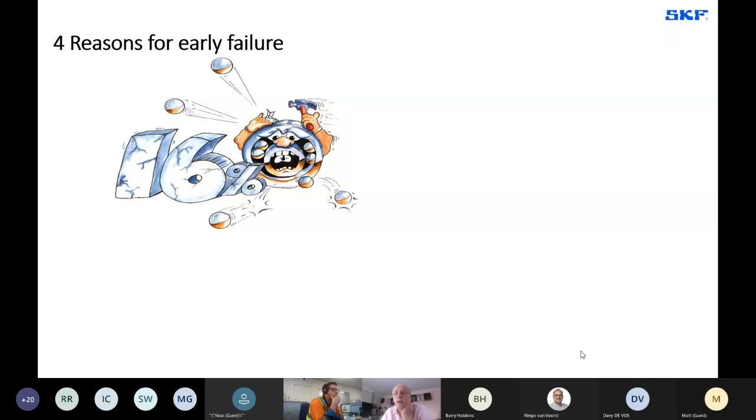We also see 34% early failures due to fatigue, to the wrong type of bearing in the application, or over time, the user demanding more from the bearing - greater speed, greater load, etc. We should also be aware that at least half of all premature fatigue failures, that's this 34%, are due to alignment errors. An alignment error indicates imbalance, an imbalance gives overload, and an overload, of course, also gives early fatigue and failure.

We also see that 36% of failures are due to incorrect lubrication, which is more than a third of all premature outages. Incorrect lubrication - too much, too little, or the wrong lubricant.

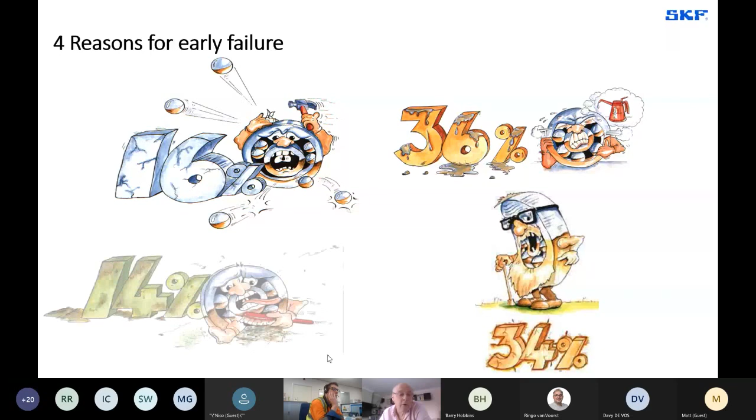Count on top of that 14% by contamination. Contamination from outside due to improperly selected seals, but also initial contamination during assembly, grinding and welding particles, and even when relubricating - there's a high potential risk of contamination. We should maintain it properly so we keep the contamination out.

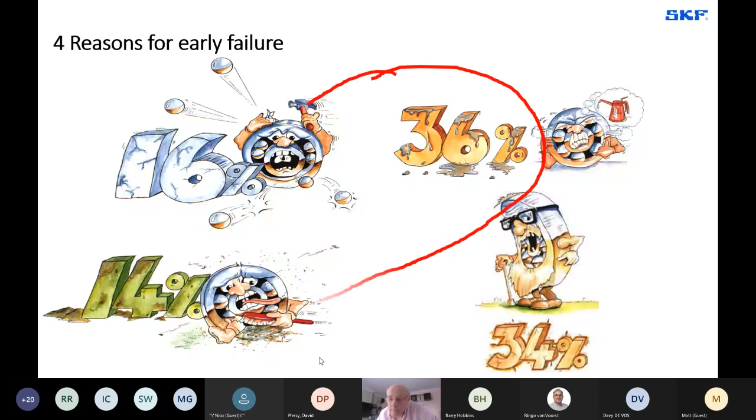With sufficient attention to lubrication and maintenance, you avoid 50% of premature bearing outages. That's more than half of the outages due to lubrication.

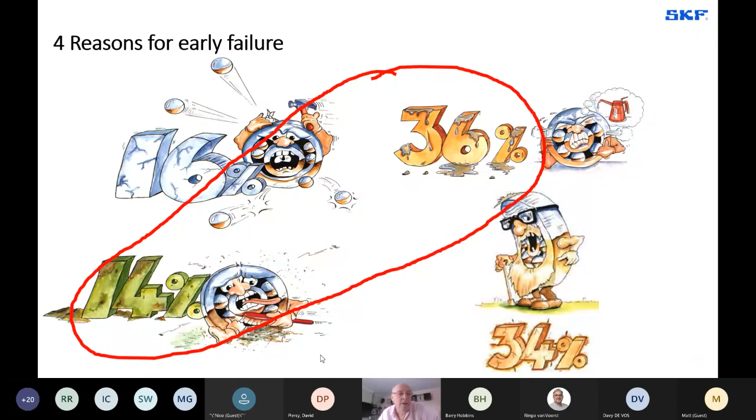So, what is lubrication? It is whatever creates a barrier that reduces friction between two contacting surfaces. This barrier may be one of various media in frictional order, starting from the lowest - gas, which includes magnetic - basically, in that case, you don't have any material or metal to metal contact at all. It just sits in a gas bubble.

Next would be air, also with air but with oil in mist or drop form. Next, oil, which is various types: hydrostatic, hydrodynamic, forced flow, bath. Then comes grease, and lastly, dry or solid.

This webinar is mostly concerned with grease lubrication, as SKF has a presence in most of these lubrication types, but as we do not have sufficient time to do justice to all of them in this webinar, we should just be focusing on grease.

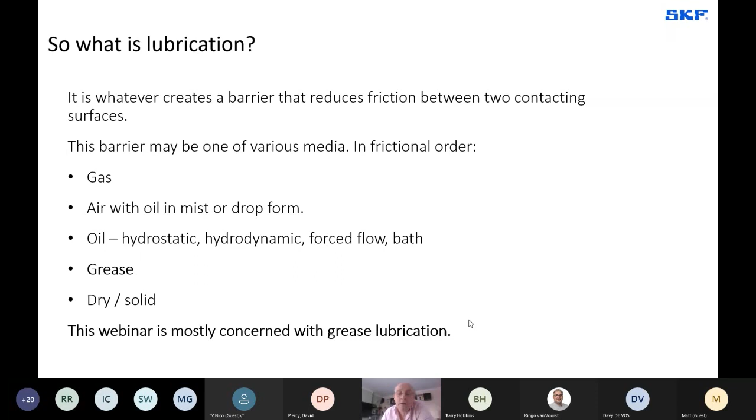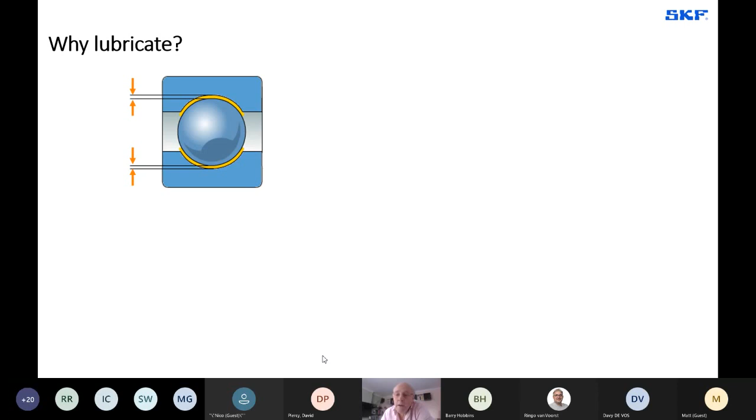So why lubricate? Primarily for separating the bearing surfaces, thus preventing wear and reducing friction. This reduces heat and flushes out particles to lessen secondary wear, as the particles act as a grinding paste to generate further consequential damage.

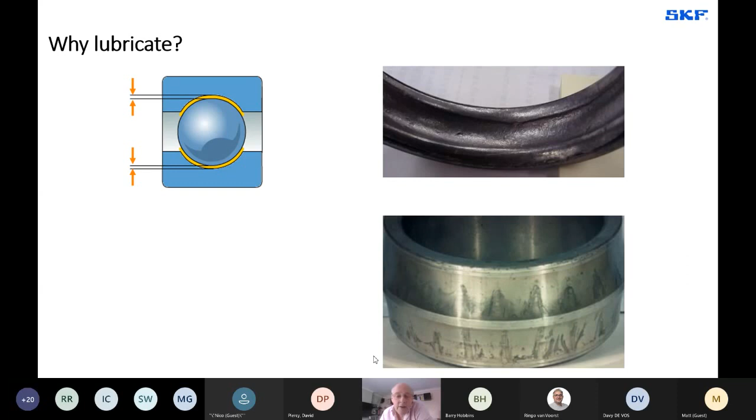Number two, secondary but also important, we lubricate to protect the bearing against corrosion and against external contaminants. We can therefore say that the lubrication acts with the seals to provide an umbrella for the bearing.

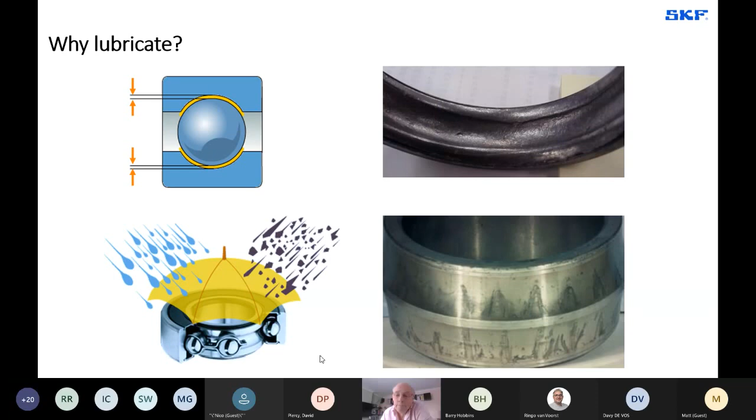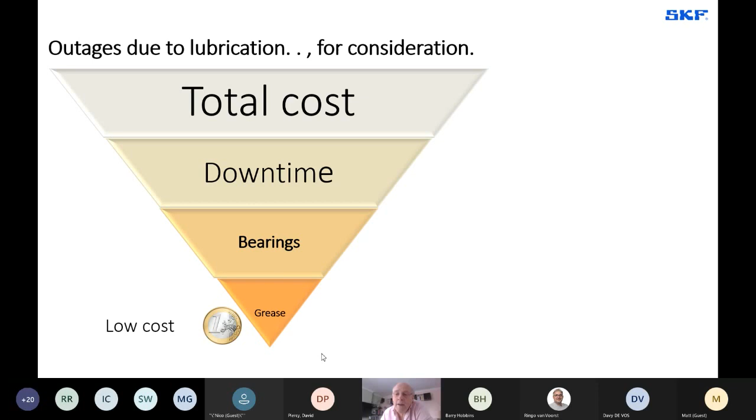When a bearing is properly lubricated and maintained, there are relatively low costs. Now, compare this to the high impact of a bearing failing, causing an unplanned, i.e. expensive, stoppage - high repair costs, consequential costs such as damage to shaft and/or housing, and of course the purchase of a new bearing. It can even lead to unsafe or dangerous situations, i.e. in an aircraft landing gear, in an elevator, an escalator and so on. That's where people's lives are at stake.

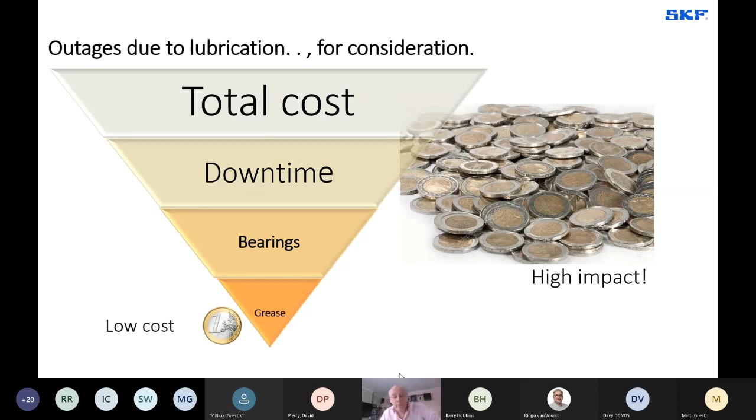Appropriate maintenance and lubrication is clearly a good investment. However, despite this, lubrication is often too much, too little, wrong lubrication, and the wrong lubricant, with questionable cleanliness. Only a partially effective sealing and debatable grease storage and documentation. The importance of proper lubrication and maintenance suggests lubrication management as a basis of operation.

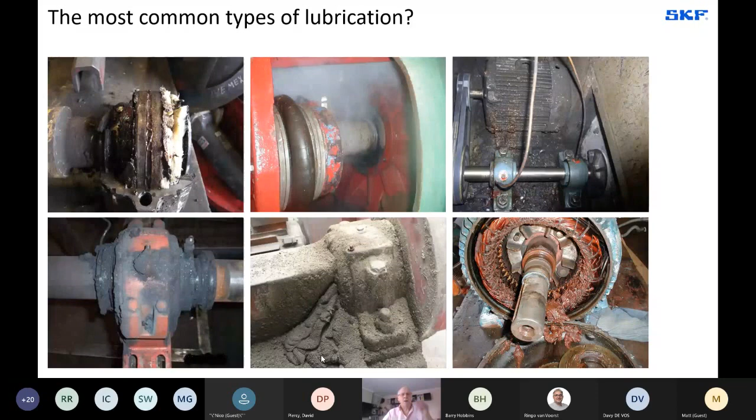Now, how does a good lubricant work? I mentioned earlier the need to create a barrier, separate the surfaces and avoid metal-to-metal contact.

We know that even with water this is achievable when we are driving in our car at high speed through a large puddle. It is called aquaplaning, as you lose contact with the road and nullify any control the brakes may have. Generally not a good idea if you value your life and even more importantly your car, but at least you have discovered lubrication.

You will have discovered, or perhaps remember from your school science lessons, the difference between a gas and a liquid. Gases are compressible, liquids are not. This means that if you load up a liquid, it will tend to displace itself, move out of the way. But during that nanosecond between action and effect, it will support the load. That is why aquaplaning tends to work better at speed.

Windsurfing is a more positive and beneficial aquaplaning example.

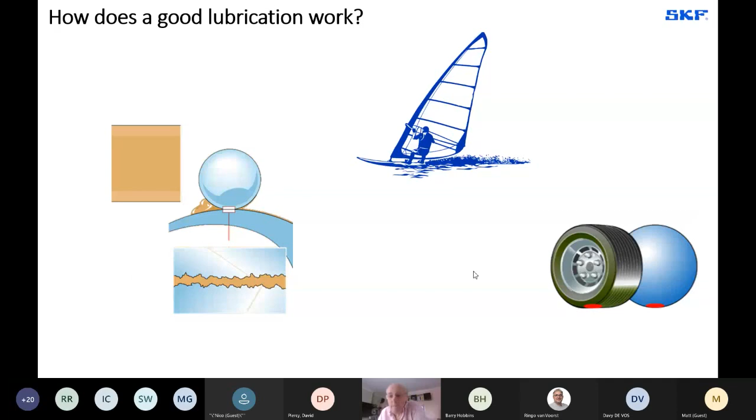In a rolling element, the process of utilising this property is referred to as elasto-hydrodynamic lubrication - a bit of a mouthful, so from now on we shall just call it EHL. In the rotating bearing, wave formation occurs in the lubricant.

That was a mouthful, I've had to take a drink.

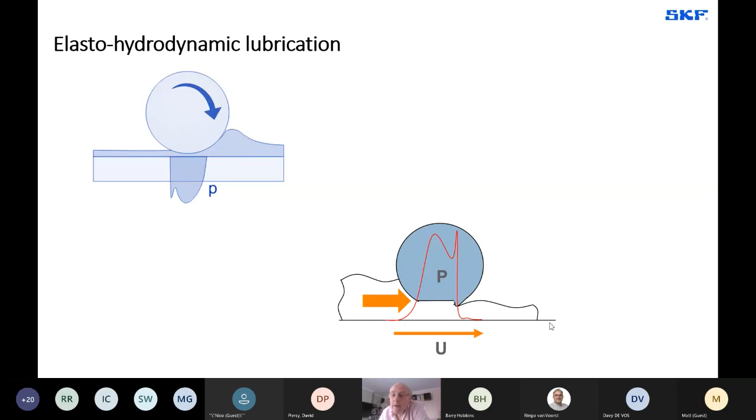In the rotating bearing, wave formation occurs in the lubricant and elastic deformations of rolling elements and raceways arise. These flat areas, like a car tyre, form the contact surfaces that we need to build a lubrication film. We're talking about extremely high pressures of up to 4,000 megapascals in the contact surfaces of the bearing.

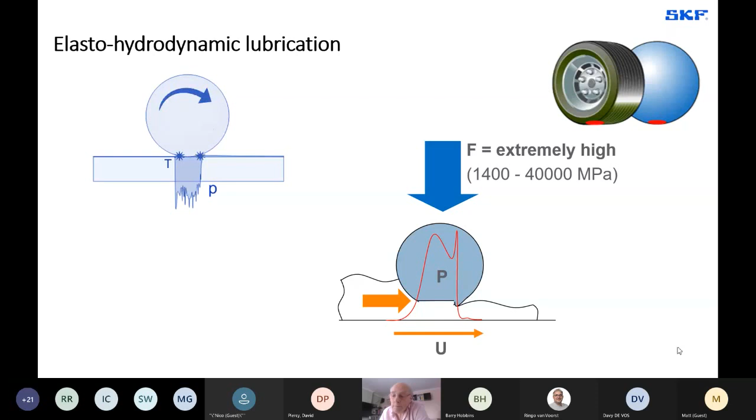As well as incompressibility, the other requirement for a good lubricating oil is viscosity. Viscosity is often described as the thickness or thinness of a liquid. It is highly temperature dependent, and values are usually quoted at 40 and 100 degrees centigrade. Water, for example, has a very low viscosity of 1 millimeter squared per second, more commonly called centistokes - so the units are millimeters squared per second, but usually referred to as centistokes.

That's at 40 degrees centigrade. Honey, on the other hand, is much more viscous than water, and at 40 degrees centigrade has a viscosity of at least 1200 centistokes. All viscosity tends to reduce as temperature rises to 100 degrees centigrade, typically to a figure of perhaps a tenth of the value at 40 degrees centigrade. So 100 centistokes at 40 degrees centigrade will be about 10 centistokes at 100 degrees centigrade.

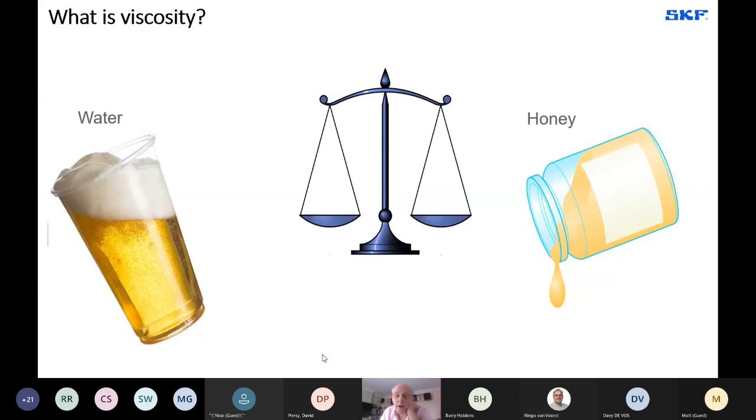That's the ratio. This ratio is normally shown in logarithmic form - you might have seen it in various charts - and it's called the viscosity index. Of course, when water converts to this, it does tend to lubricate pretty well, but I digress - that's just another type of lubrication which we won't be talking about too much in this webinar.

You may also remember from your science lessons the teacher demonstrating viscosity by filling long thin tubes with different fluids, then inverting them and measuring the quantity retained by the fluid's surface tension remaining in the tube. This directly relates to why viscosity is so important to EHL, and why speed and temperature are so important to the process, because the oil needs to adhere to the bearing surfaces for long enough for the process to work.

Obviously, the higher the viscosity, the higher the speed, and the lower the temperature, the easier it will be for the oil to stay in the contact and for a pressure wedge to form. If the speed and stroke, or the viscosity, is too low, it cannot form.

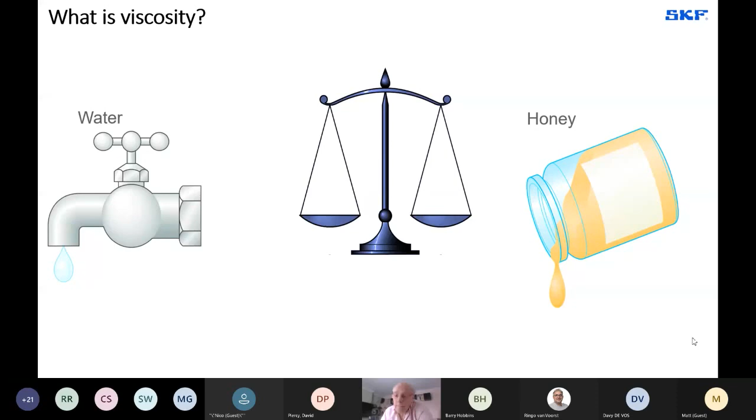Now, viscosity, ISO viscosity classes. When we talk about speed in any calculation, we mean linear speed. We convert it to linear speed, normally millimeters per minute rather than RPM. To do this, we multiply the shaft or wheel speed in RPM by the mean bearing diameter - which is the outside diameter plus bore, divided by 2 - to get what we in the bearing industry typically call an NDM factor.

So it's not necessarily that simple, just looking at the speed - you need to look at the bearing size and the bearing type as well. Also, of course, a given bearing size operating at high speed but also high temperature may require the same viscosity as if operating at low speed with correspondingly low temperatures.

So that's an interesting one. That means that a bearing running at high speed and generating the sort of temperature that would result from that high speed may actually require the same viscosity as one that's at slow speed and generating no temperature at all.

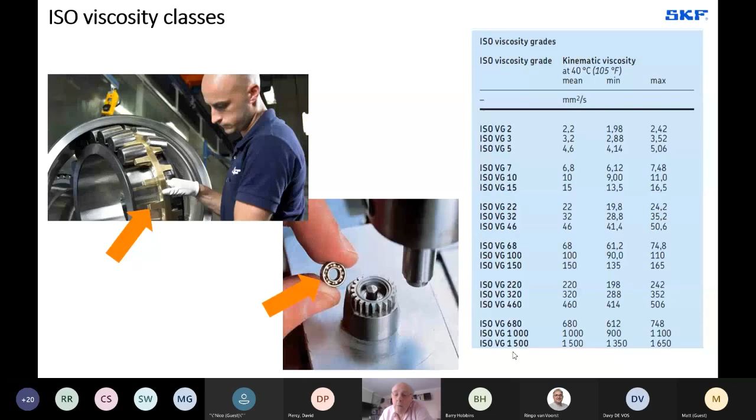My background is in pumps and other fluid machinery devices, which in my experience tend to use ISO VG 32 to 68 - that middle range. ISO VG 100 and above tends to be used for gearboxes and large, heavily loaded, slow movement applications, etc.

Lubrication film buildup: provided we know the bearing size and speed, we can calculate viscosity required to achieve EHL. And provided we know the oil grade and temperature, we can also calculate the viscosity achieved by the lubricant.

So we've got two things: viscosity required for an application, and viscosity achieved by the lubricant. Dividing the viscosity achieved by the viscosity required, we get the viscosity ratio kappa, as shown here, K.

Kappa should ideally always be greater than 1.0. However, if it is much greater, or up to 4 or greater than 4, we get uncomfortably close to the aquaplane example shown earlier, where the rolling elements slide rather than roll, risking premature failure from cage damage as the rolling set moves out of control.

However, less than 1, and the application ends as a boundary or mixed lubrication phase, where there is some asperity contact, shown by a polished track appearance. If you get the bearing apart and look at the raceways and it looks polished, that may well mean the kappa value is less than 1.

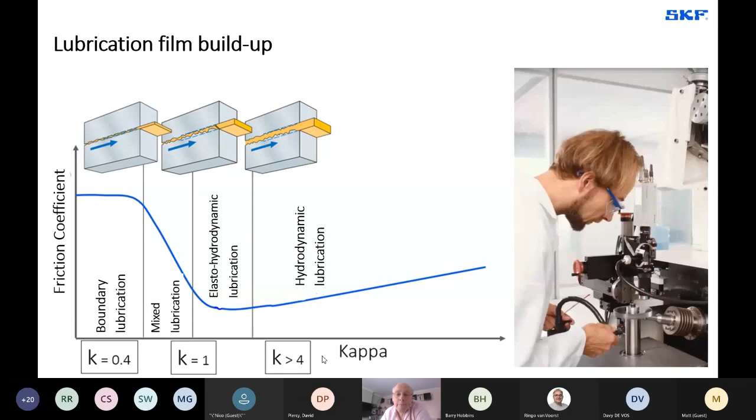So we know what a separating oil film is, but how thick is it? The answer is between 0.1 and 1 micron. Very, very small, as you'd expect.

0.1 and 1 micron. Now, as a honed and polished finish of an SKF bearing is about 0.2 of a micron, a 0.1 micron oil film thickness would only achieve boundary lubrication.

EHL is only really achieved at about 0.5 of a micron to 1, about 0.5 a micron really. 1 micron would be a very high kappa value indeed, so you're really achieving quite good if you could measure it, but at 1 micron you'd be doing very, very well.

Apparent from this is the fact that you should never compromise on bearing quality in terms of rolling track finish. Even if you can't get an SKF Explorer bearing, at least ensure you are using another quality brand.

Equally apparent is the danger a large, hard and sharp grinding or welding particle, about 20 times larger than the thickness of the grease film, would have on the bearing.

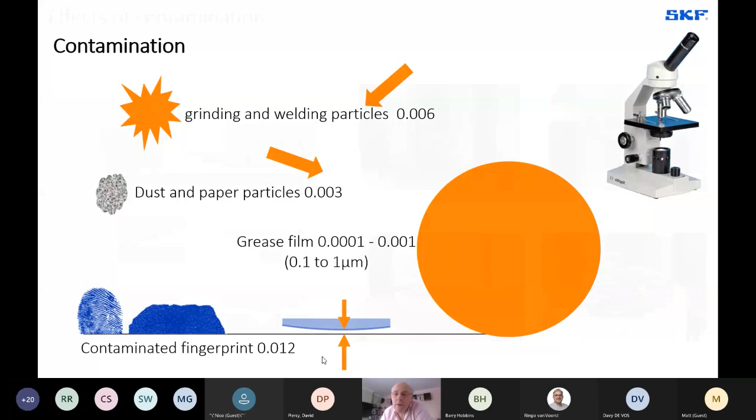And that shows what happens. Such a particle tends to fragment as it's drawn into the rolling path and overrolled, to seed potential stress raisers which could become the source of future fatigue spalls. Dirt particles such as these may therefore have a reductive effect on the calculated fatigue life of the bearing.

However, on the positive side, awareness of contamination may also enable steps to be taken via improved cleanliness, maintenance, and oil filtration to improve the bearing fatigue life. Analysis of particle size, hardness, and type, and of course probability of such particles entering the bearing load zone, has in recent years led to the development of advanced life calculation models.

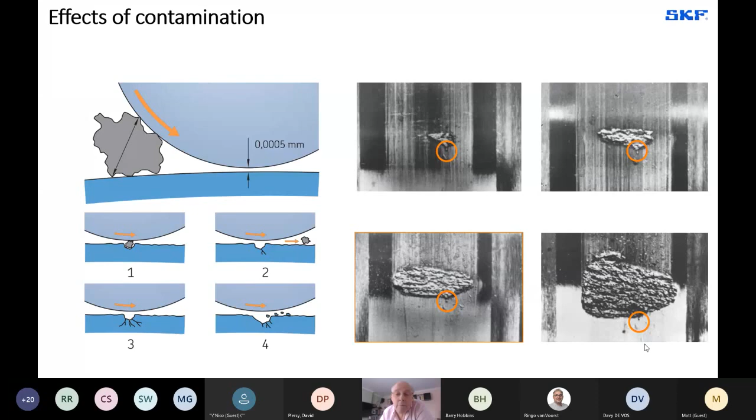Up to now, we've been discussing oil, not grease. However, grease is merely like a sponge releasing oil over a period of time. These points are therefore equally applicable to both.

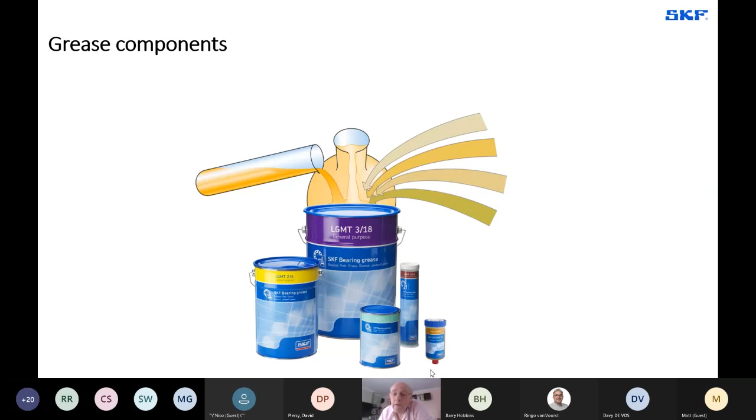The vast majority of grease composition is oil, sometimes up to 95%, and can be a mineral, synthetic, animal, or vegetable oil. The thickener tends to be a soap skeleton, such as lithium, calcium, or sodium.

And then additives for improving properties such as anti-corrosion, antioxidants, and extreme pressure and anti-wear agents such as phosphorus, sulfurs, or chlorides, and solids such as molybdenum disulfide, ceramic powders, teflons, or graphites.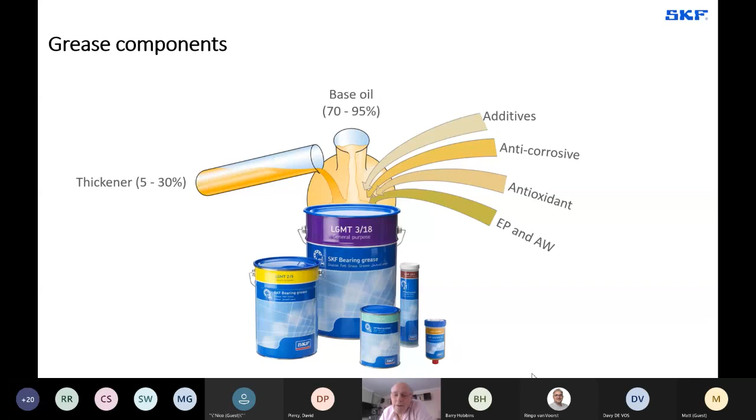Now, different oils and thickeners are not necessarily compatible with each other. Compatibility is indicated in this table for many of those different components, so care must be taken to ensure that incompatible greases are not mixed. Organisation is obviously the key.

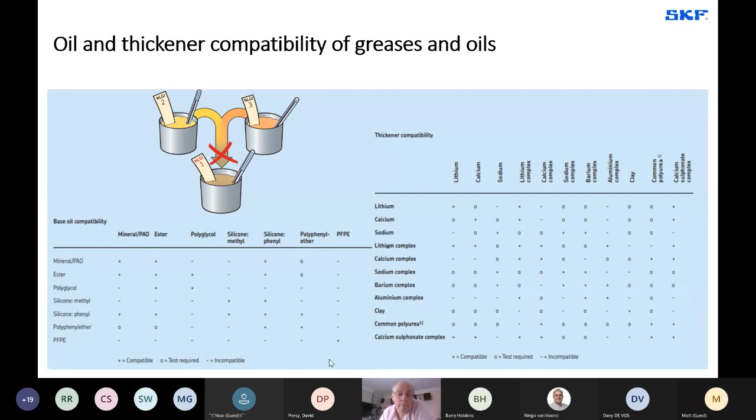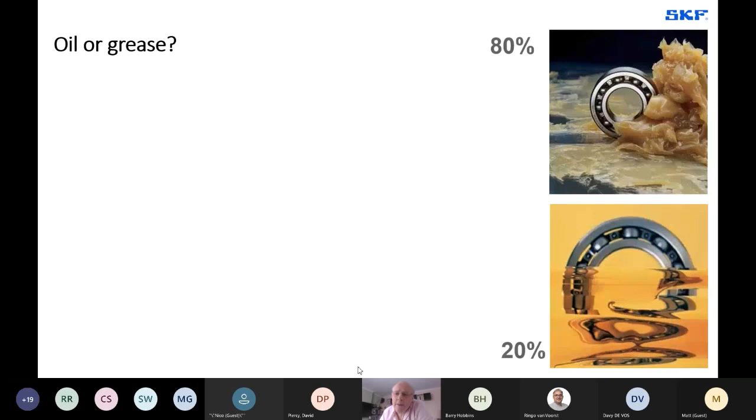So, oil or grease, which one do we want for any particular application? Some 80% of all applications do use grease. The advantages are self-evident: grease generally means simple seals.

These are some of the seals shown in our sealed for life non-regreasable bearings, to retain the grease rather than complicated ones to retain oil. This is particularly important in vertical applications.

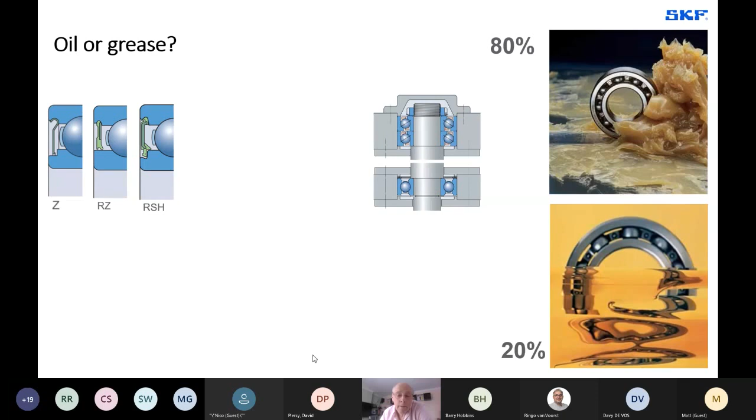Oil needs to be monitored to ensure correct levels and quantity to enter the bearing. Not the case with grease, which with automatic dispensers is generally maintenance free.

Nice and easy. Even in challenging, dirty applications, grease is often used to purge contaminants away from the bearing. With maintenance-free being increasingly important, more and more designs are being made for grease lubrication.

Oil is increasingly being used at the extreme margins where grease is not so effective, where a flow is required to reduce temperature, for instance, or for large bearings moving at speed, or in gearboxes where the oil lubricates the gears also.

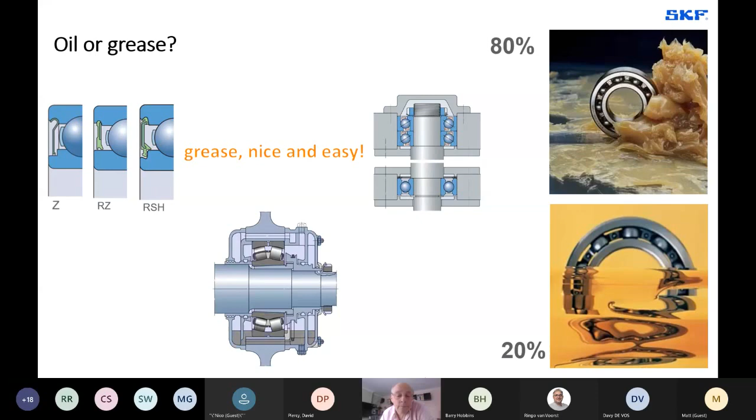The right grease: it's important to understand there are hundreds, or perhaps thousands, of different types of greases. We alone in SKF have about 20 different types with specific properties and characteristics in our portfolio, and of course there are many more grease manufacturers and suppliers with an even broader range. Making the right choice for your application is therefore quite complicated.

The right grease depends on many factors, such as the type of bearing, the speed, operating and ambient temperature, size and type of load, application setup, whether it's horizontal or vertical, and of course requirements around food safety, biodegradability and chemical resistance.

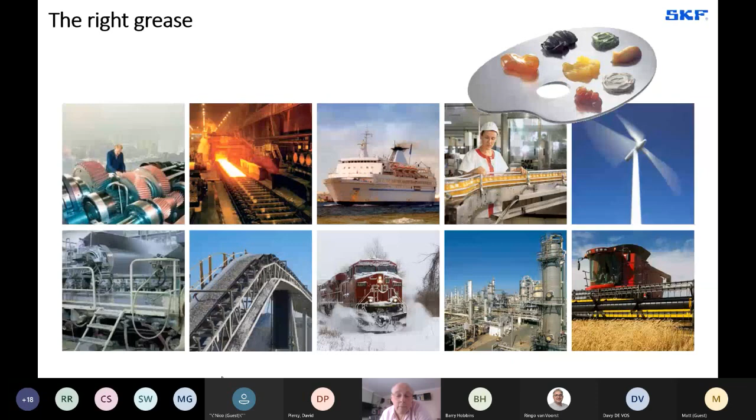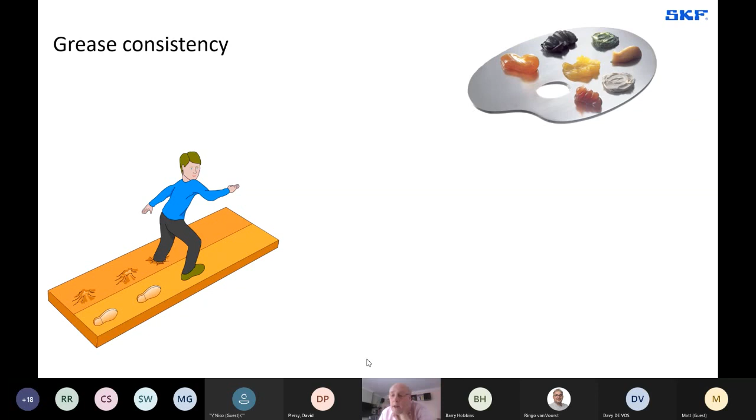Another important feature of grease selection is consistency. Grease consistency depends on the type and quantity of soap, the viscosity of the oil, and many other factors. A grease can be hard, like a wax, or very soft, like a thick oil.

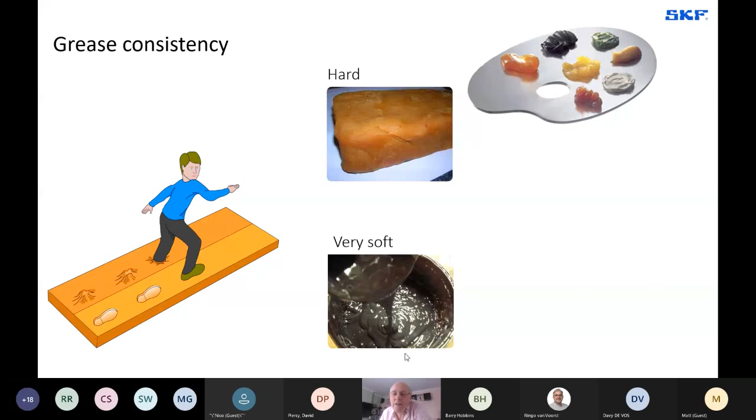A grease consistency class is indicated according to the NLGI index, where NLGI stands for National Lubricating Grease Institute. There are 9 classes in the NLGI index, but only 3 are generally used for rolling element bearings.

The standard choice tends to be a number 2. But with large bearings, high ambient temperatures, vertical shaft, and above-normal vibrations, a consistency 3 would be a better choice because it's a bit stiffer. These types of applications require a thicker and more stable grease than normal.

However, at low temperatures, oscillating hinges with not fully rotating movements, and with central lubrication systems, a slightly softer number 1 is preferred, where the oil needs help to bleed, or I prefer the term sweat, out of the thickener. So I think you can see that.

The softer grease is like butter - in fact, butter is a very good analogy. When you take butter straight out of the fridge, it's hard as anything. Leave it out for a while and it softens due to temperature - that's temperature doing its work, reducing not only the viscosity but also the consistency.

Consistency is determined with a consistency meter, shown here. At lab temperature of 25 degrees centigrade, we leave a cone with a certain weight for 5 seconds in a jar of grease, and the number of tenths of a millimetre the cone penetrates links to the NLGI consistency table. That's what all those numbers mean - going from 475 down to about 85, which is just the number of tenths of a millimetre the grease deforms in that test.

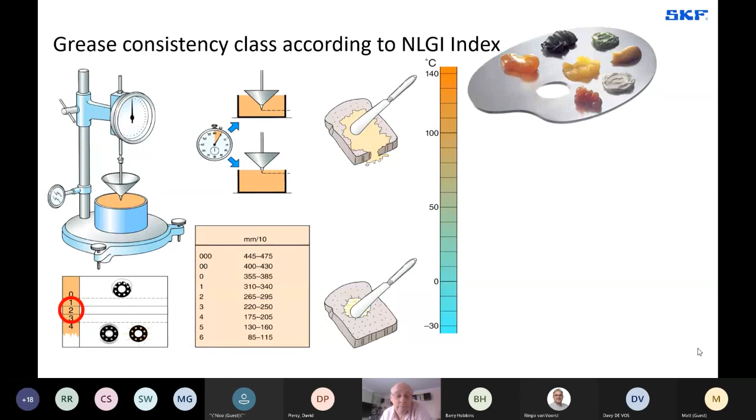Now, the correct way of lubricating. The initial lubrication should usually follow the assembly and adjustment. The bearing should have 100% fill, except for CARB, which only requires about 50%. But I won't go into the reasons why - if you're interested, just drop me a line.

Apply grease on one side of the bearing until it is seen emerging from the other side. Use gloves and suitable tools to prevent contact with the body. Then apply grease into the free space on both sides of the bearing.

The quantity depends on the speed. Normally it will be 40 to 50% of the free space. However, for high speeds - defined as more than 70% of either the reference or limiting speed specified in the catalogue, whichever is lowest for the relevant bearing...

...we fill the grease space up to only 20%, because too much grease can be damaging. At low revs, which is less than 20% of the reference or limiting speed, whichever is lowest, we fill the grease space maximum 90%, almost fully packing it, because at that low speed we're safe to do so. Know that too much grease can cause overheating.

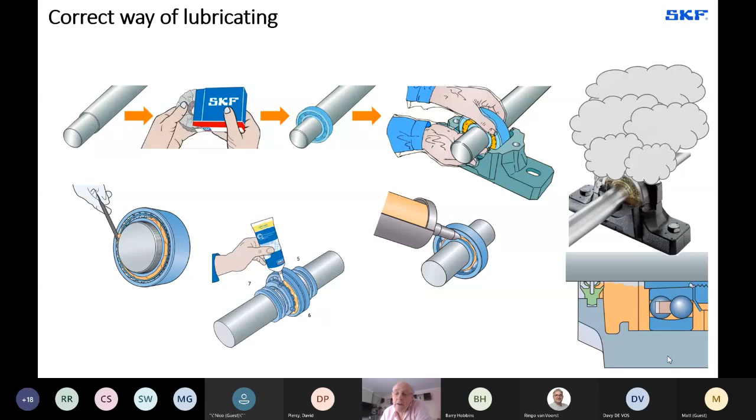This can lead to early bearing failure, but also a potential fire hazard with all the consequences of it. After proper lubrication, the bearing system is closed off from the outside world as quickly as possible by placing the cover and seals, and providing the seals with initial lubrication and a dollop of grease.

Relubrication of bearings: like the grease selection, the relubrication interval is a function of bearing size, type, speed, temperature, and load, but also shaft orientation, horizontal or vertical. With this information, the relubrication interval may be calculated in operating hours.

The quantity of relubrication can be calculated in grams from the size of the bearing and the method of lubricating it. It is very important to ensure that lubrication is provided through the bearing, and that old or excess grease can be removed from the bearing system when relubricating your application.

After all, too much grease causes overheating and premature failure, and therefore extra costs, and is also harmful to the environment. We often see too much lubrication where grease is continuously pumped into a dead end on the expectation that it's going somewhere important.

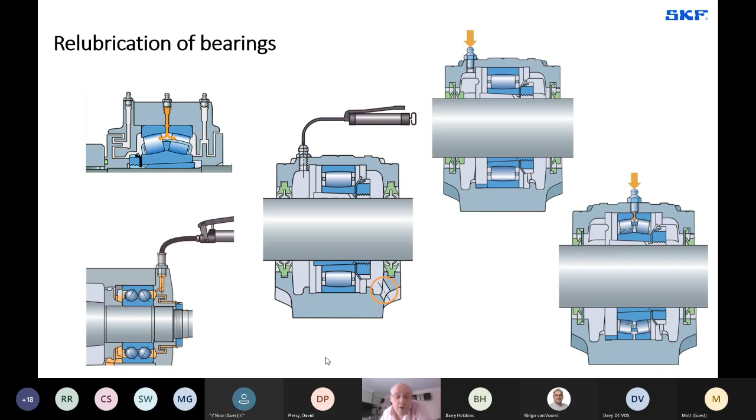Now, how often does someone shout, "Help! That motor gets so hot, and I've already lubricated it a little extra"?

Note the sealed bearings. These cannot be lubricated and should not be relubricated. Or this example...

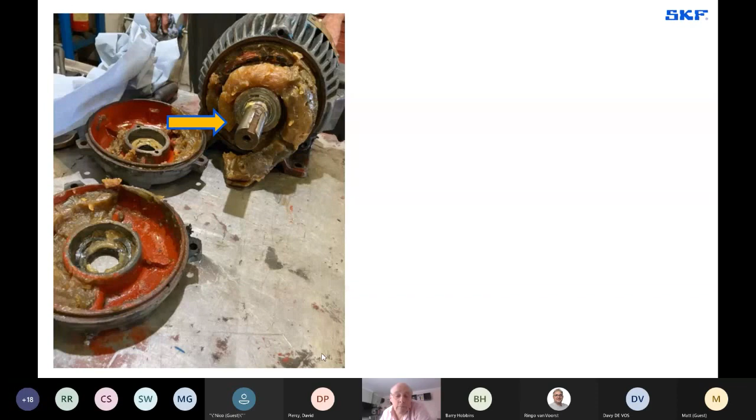Look at the grease nipple and the excess grease. You can bet that the bearing does not get lubrication.

And in this example, we could have used a lubrication groove in the bearing to lubricate. So if it's a spherical roller bearing, it does have that lubrication groove, which is very handy. Always look into the possibility of using that - not always possible, but definitely worth checking.

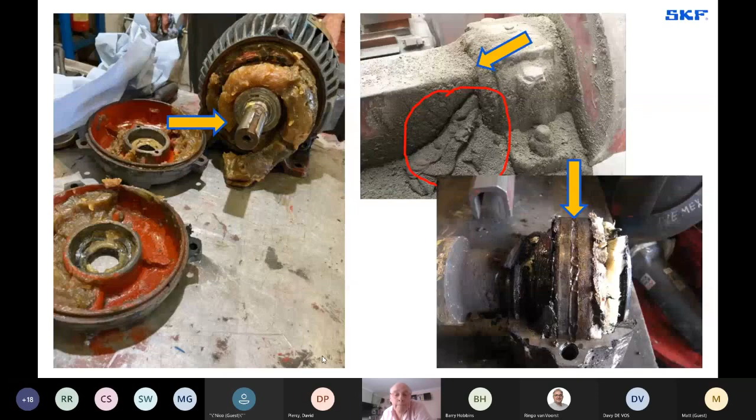Lubrication management: consider a detailed lubrication management program. Consider a hand or automatic lubrication method. Think about the right tools and equipment, availability of qualified personnel and lubrication technicians. Work with lubrication schedules and lubrication routes. Think of condition monitoring, inspection of your rotating equipment, applications with equipment and sensors.

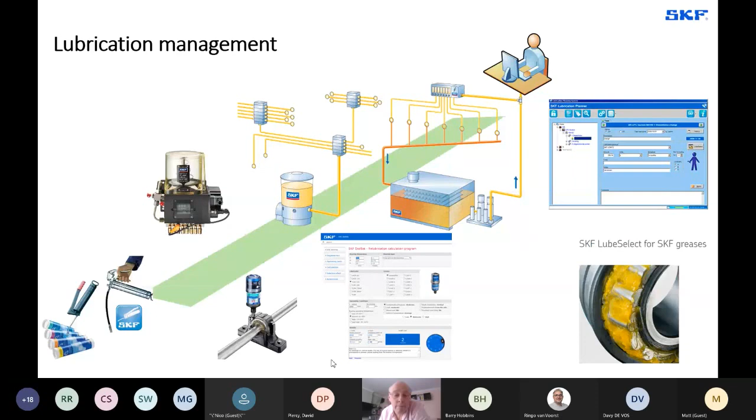Also have sufficient care for your lubricants. Remember the dangers of mixing incompatible greases and the need for organisation. Also, the availability of the right lubricant and care for storage and stock, for example, considering the environment in cases of leaky packaging, and also storage time and shelf life of lubricants.

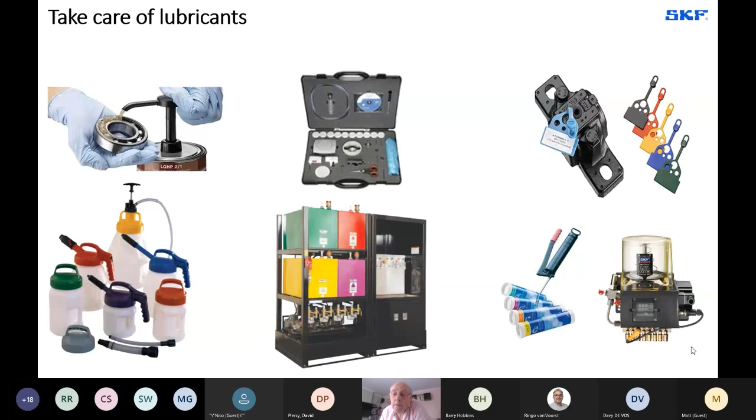Also ensure careful inspection before using your lubricants. Take care of new, clean packaging, ensure clean and professional tools, and provide protective gloves. Many people have allergic reactions when coming into contact with industrial lubricants, so also make sure that the material safety data sheet, MSDS, is available.

Also, very importantly, make sure of proper disposal of lubricants, used or not. Think again about the environment.

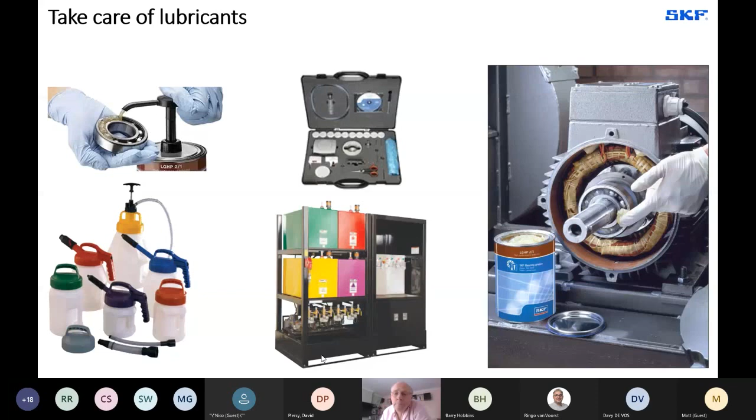And again, think about the 36% premature bearing loss that is due to incorrect lubrication.

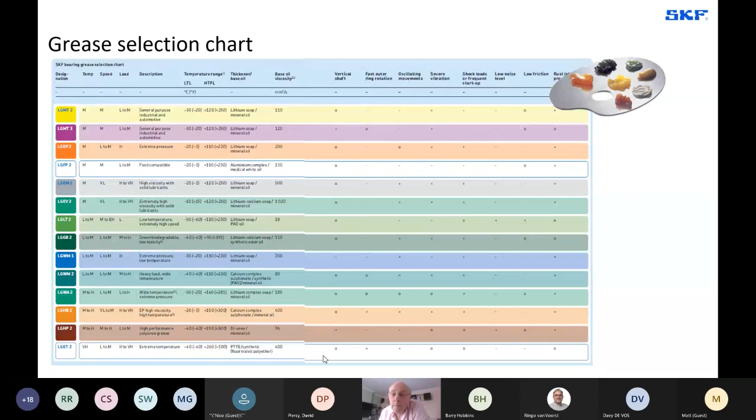We're also happy to support you with the right tools to carry out lubrication in the most optimal, environmentally friendly and safe way. Our authorised SKF distributors are happy to help you select the most suitable tools for your work. Good tools are half the work and will reward you by making your application run more reliably and therefore longer.

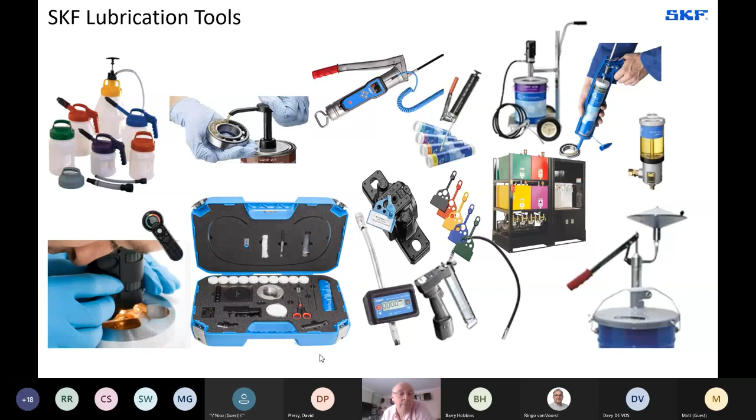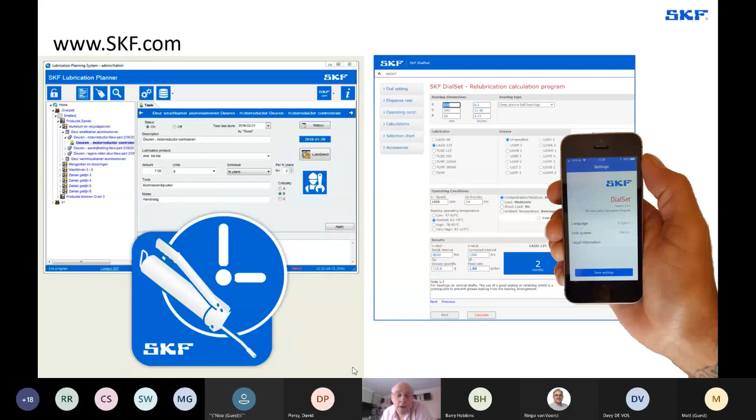Also, on our SKF website, www.skf.com/support/engineering tools, there are programs available including SKF Lubrication Planner, which is a lubrication planning program, SKF DialSet program that can help you determine the correct lubrication interval and lubrication for different automatic lubrication systems, and SKF LubeSelect.

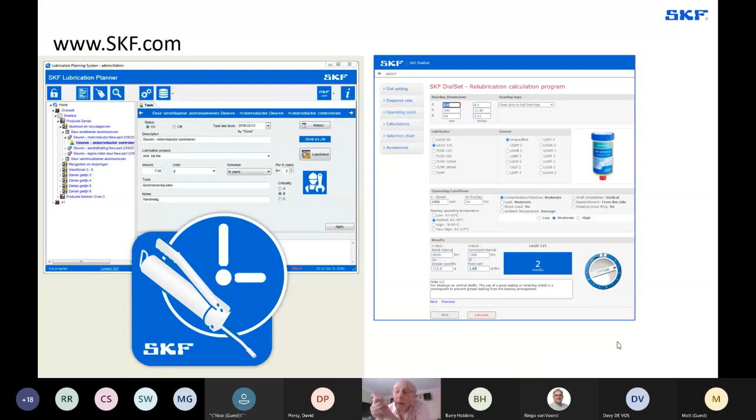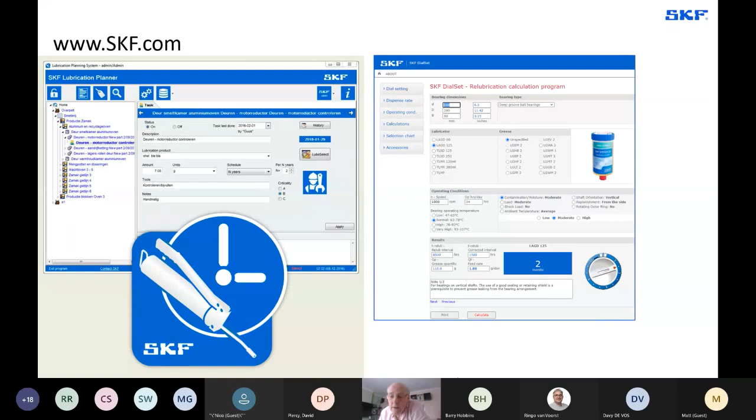Which, as the name implies, is a program that can help you choose the right lubricant for your application. However, the program does not take into account all the details of your specific application and chooses from a limited number of greases that have been tested by SKF. Of course, you remain responsible for your choice of lubricant, so please consult the applications engineers to make the right selection choice.

For the right knowledge to be able to make the right choice, we're very happy to recommend our SKF lubrication training. After following this one-day training, the lubricant technician should be able to make the right lubricant choice, thus significantly extending the life of your bearings and improving the reliability of your applications.

The lubrication technician will also be more aware of lubrication in the right way and be more motivated to carry out the work safely for yourself and the environment.